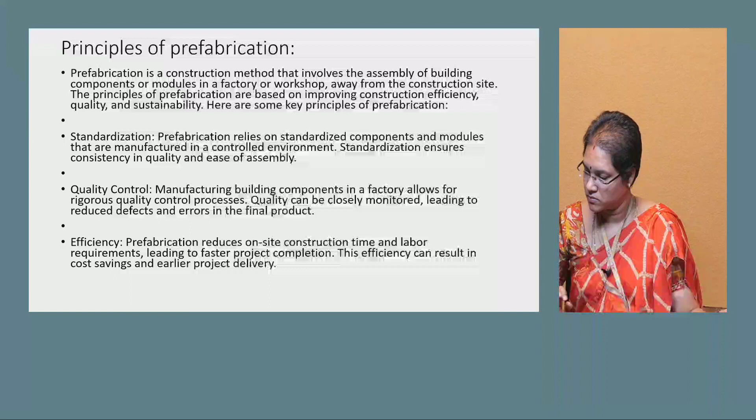So the next session is on principles of prefabrication. So as of now we have learned about the importance of prefabrication, existence of prefabrication, then need of prefabrication when compared with general concrete, and then the applications, the challenges, and the classification of prefabrications were learned. Now about the principles of prefabrication. What are the principles required for the prefabrication actually?

As we know, it's an assembling of building components required for the construction activity, and it is based on quality and sustainability methods, and all this is considered. Then comes what are the requirements of prefabrication. Prefabrication is that you will be assembling products, and then the final execution of the product will be there for the construction of the building. This plays a crucial role in material choosing, casting, transportation, placing, erection, and all these principles are there. So what are the standards? What are the main principles of prefabrication?

Standardization. Prefabrication relies on standardized components and modules that are manufactured in a controlled environment. Standardization ensures consistency in quality and ease of assembly. So what standardization is required for this? The main thing is the quality of the material you have chosen, and then finally the assembling of the material. At that stage, while assembling, check whether the standard dimensions of the panels or members were chosen or not. According to that, the designing and casting will be done.

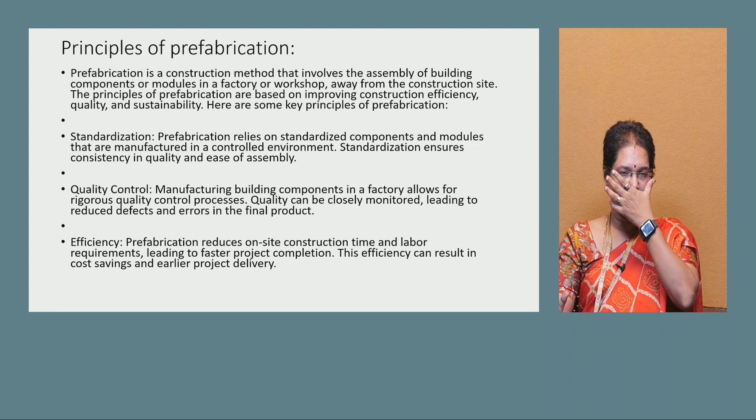So design for manufacturing and assembly, which we call DfMA. The DfMA principle focuses on designing components and modules with ease of manufacturing and assembly in mind. So where we have to design and place these components, we can easily assemble them. Then design decisions consider how the elements will be produced and joined together. When you go for assembling, the assignment given to you was to create a room with given panels. We will do that by the size of the exterior walls: the front side dimension, the side dimension, and the back side dimension. These will all be designed and listed, and based on that we can frame it.

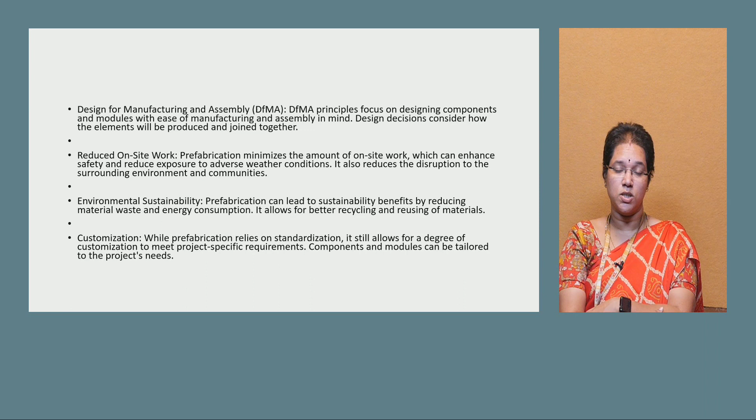Okay. Then reduced on-site work. Prefabrication minimizes the amount of on-site work, which can enhance safety and reduce exposure to adverse weather conditions. So this is also an on-site process. Here we will be advising to reduce exposure to environmental conditions, because based on the environmental conditions we will be doing so many things, as I discussed in the previous session. Storage, where we have to store all these elements.

Whatever construction is done has to be dried under wet conditions—this is the curing stage we have to go through. In prefabrication, this can be reduced.

Environmental sustainability: prefabrication can lead to sustainability benefits by reducing material waste and energy consumption. It allows for better recycling and reusing of materials. It is environmentally sustainable—reuse of materials will be there, it's easy in consumption and easy in placing, and it's recyclable.

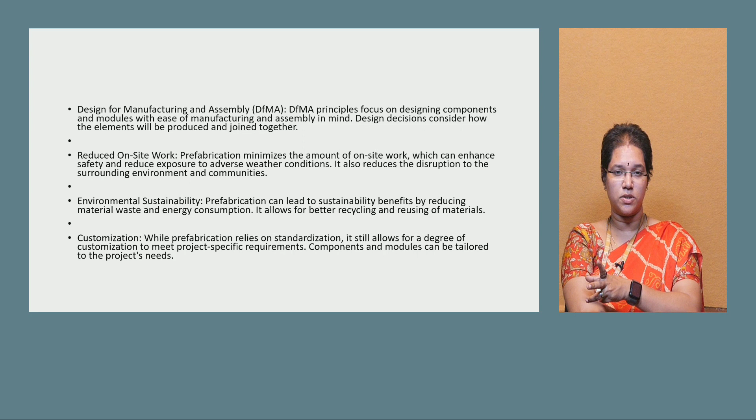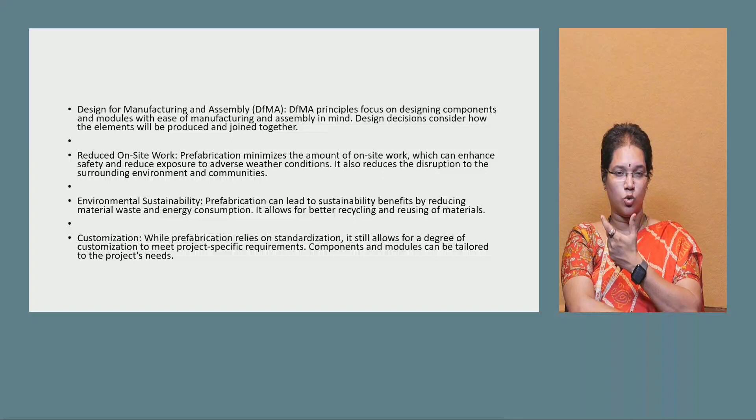Customization: while prefabrication relies on standardization, it is also easily customizable. Standard sizes will be there, but from an architecture point of view, interior-wise customization has to be available. Every customer will ask to what extent we can project customization, and that is available here—it's a very useful thing.

Transportation and logistics: transportation is an essential component of prefabrication. Efficient planning and execution of component transportation to the construction site is required. Skilling and training also matter—only under skilled conditions, with skilled persons, will standardization methods be properly applied and preparation done.

Integrated project delivery: construction teams, engineers, and architects will all be involved. Among all these stakeholders, the project will be delivered together.

Cost consideration: prefabrication can lead to cost savings, but it requires thorough cost analysis to determine economic feasibility for a particular project. Generally people think it's costly, but we can effectively utilize the cost—as engineers, we tell you the budget accordingly. Compared to normal construction, people may say it's costly, but it's useful for large-scale construction activities, as compared to small construction activities.

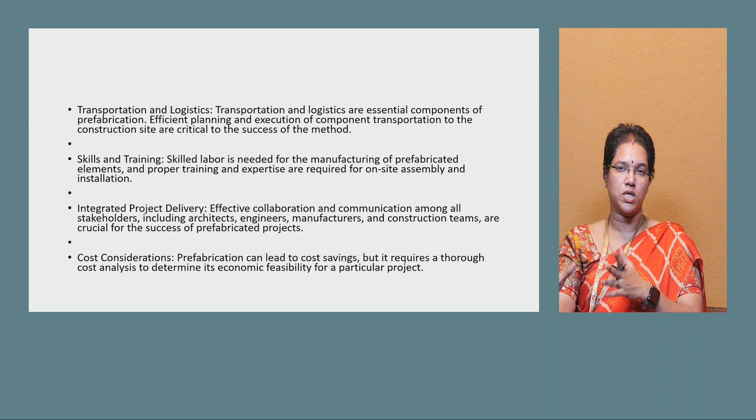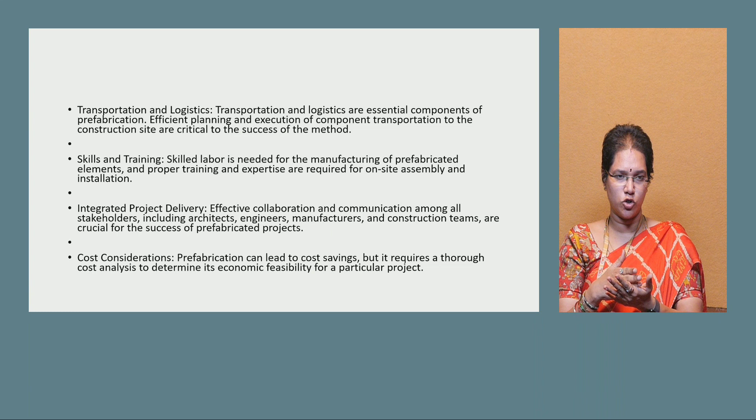Regulatory compliance: based on building considerations, we design accordingly, so design considerations are already factored in during execution. There's no need to worry that it's not under standard conditions or can't withstand loads—factor of safety considerations will definitely be there.

Post-assembling considerations: prefabricated components may require inspection, maintenance, and quality assurance post-assembly to ensure their long-term performance. This is all based on design criteria. Maintenance is required for anything—only if you maintain it properly will it perform well.

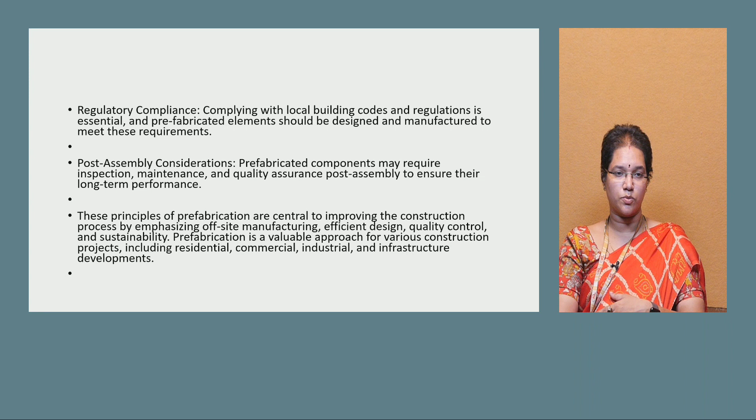These principles of prefabrication are central to improving the construction process by emphasizing off-site manufacturing, efficient design, quality control, and sustainability. Prefabrication is a valuable approach for various construction projects, including residential, commercial, industrial, and infrastructure developments. We have to keep all this in mind—it's not simple that it's useful for all these projects or types of construction activities. When we give an assurance to a product, it has to deliver good results.

So this is assurance that we are getting, though we are telling in many reasons also, no one is trusting that this can be under this category. Category-wise you have to study this, not directly or blindly go for saying this is not suitable. Category-wise, where they use for residential, commercial and all, those ways you have to think about what is a large project or medium project, to what extent we can sustain this. We need to develop our thinking aspect, and then execute for that.

And then materials used for prefab. What are the materials used? Concrete, steel, wood - already we have this. Here many materials are there.

So precast concrete is there, casting of concrete. So precast means what? It's pre-tensioning - tensioning of steel we will be doing, and then the concrete will be placed. That is pre-tensioning of concrete. Post-tensioning is tensioning of steel against the hardened concrete. These two are there. Then comes the steel.

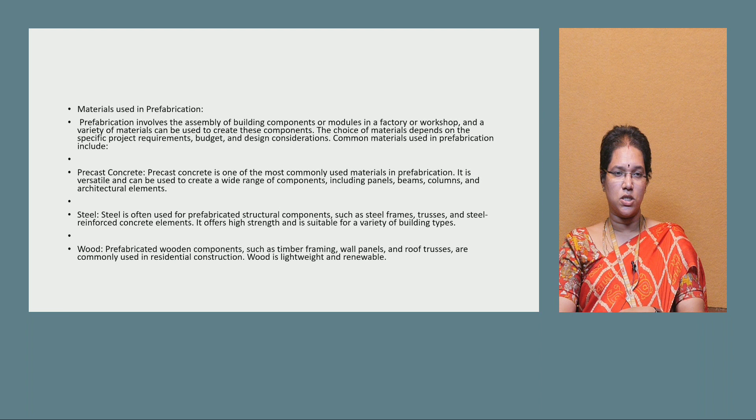The steel is taken, and then comes the wood. Then the glass material is being taken, and also the aluminium. Then the composite materials are taken into consideration. Then masonry, fiberglass reinforced plastic - this is the new technique that we are using nowadays. Previously glass, aluminium and composite means composition of both steel and concrete only.

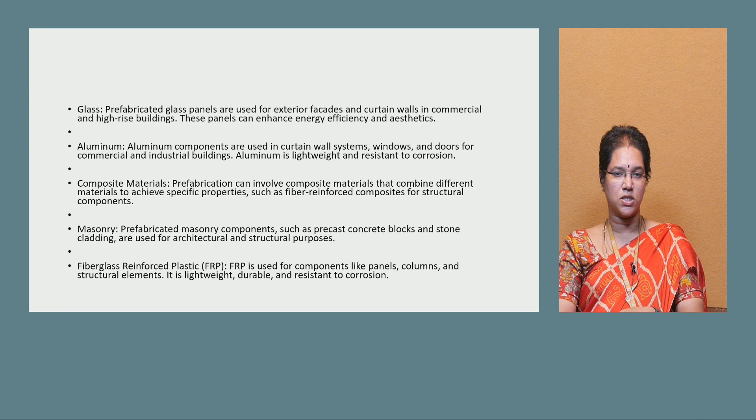Masonry works - everyone knows that block-wise stone cladding, everything will be used for architectural purposes. Fiberglass reinforced is the most efficient one we are doing - lightweight construction, and then panels, columns etc. will be using this, so it is durable also.

Then nowadays we are using plastic also, PVC - this is also very effectively utilized. Then modular building materials - it is used for composition of the materials for construction activity. This includes combination of steel, wood, concrete. So that is modular building methods we will be doing.

And then insulation - insulating something in the prefabricated walls, and then ceiling purpose panels will be using this. Roofing materials, whatever is used for roofing, shingles are used, you know very well. So these all are roofing materials, so directly we can use. And specialized materials are there, which come under the category of prefabricated components.

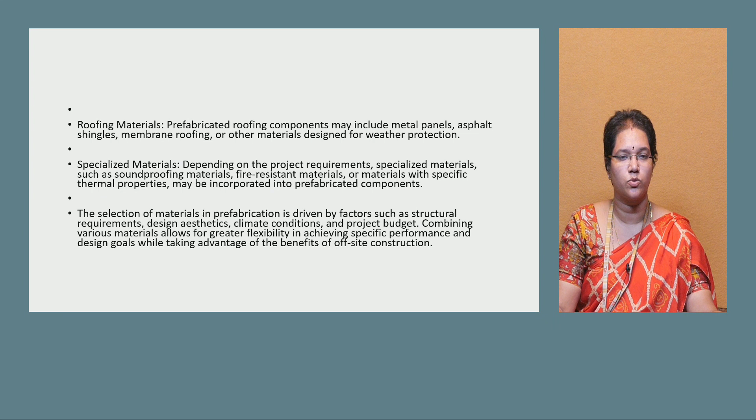Then comes the selection of materials in prefabrication - budget-wise, low to high, it is there. This is useful for a specific purpose, so specific purpose only we will be using. So the material use, this is the thing - the modular way, directly the panel.

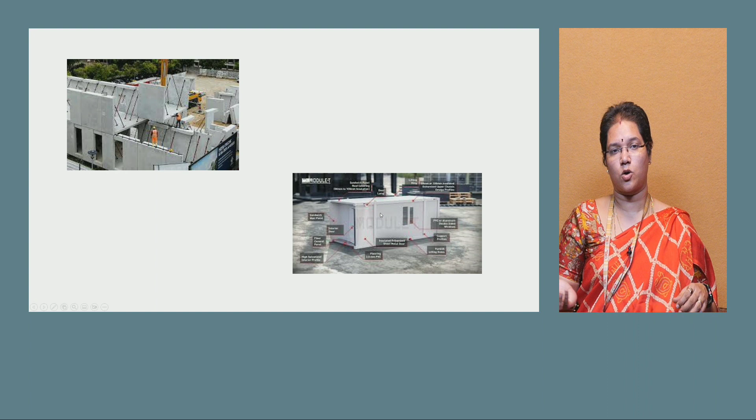So this is a modular house. Modular toilets are there nowadays too - with iron they will be doing PVC and iron combination, and so modular houses also we can do. But some will be telling that it's not safety-wise good, likewise. But since it is just portable, not a permanent house, whenever you have to go stay for these many days, those who need efficient construction activity, definitely we can use this.

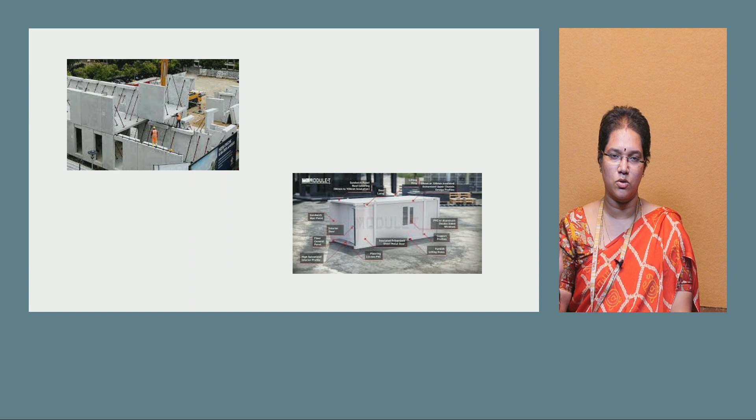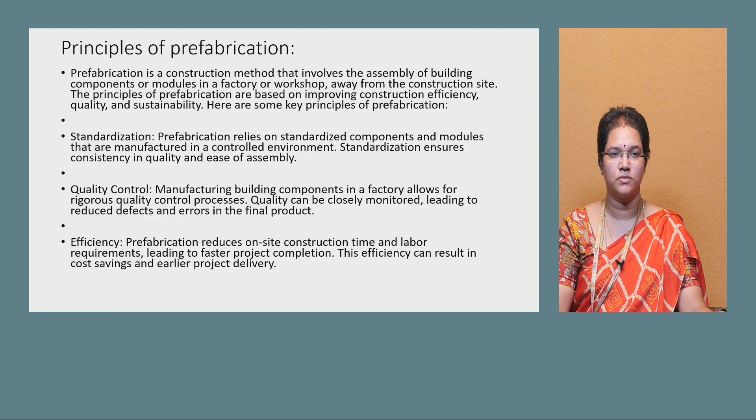Construction people definitely will be using a lot of site visits for construction activities, and there they will be using mostly this. So this is about the materials that are used and principles of prefabrication and materials used. This is very effectively utilized. These are used for construction, and the construction process is this one - this is the way, modular house technology we call it.